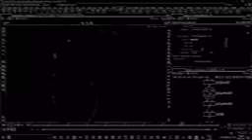More poly extrude to the bottom of the top one, because we want it to face the bottom one. This is the top one, the bottom one we extruded the top, and the top one we want to extrude the bottom down. So that's what this extrude number 7 is.

More extrusion, I pull it out like I did before. We all know how to fix that, edit it back to like a square like this. Very simple, we are working our way to get the shape. So you have that in your mind, and you work towards that.

Have a situation where we think that we have enough polygons. We have a polygon here and a polygon here, we have some here too, and we want to use a bridge. I think one bridge on this side, okay, and I'll do one on this side too. So, boom.

I created make circle, remember make circle? We tried that in the initial part of the course, okay? But it's very simple. Make circle is when you select 4 polygons, okay?

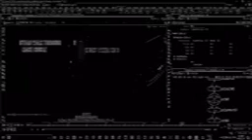So let me show you real quick. We are still on the edit, right? Because you use the edit to do that. So when you are on the edit, you have to call the move tool, right? Hold shift, select this polygon, select this polygon, select this polygon. You have 4 polygons, remember?

And then you move away from the polygon, because when you get close, you're going to have this dialog or this menu, and this menu does not have make circle. This is the one that controls the handles and stuff, the view. So when you move a little further away from the handle, somewhere around here, and you right click, you have make circle here. See, it gives you a lot of menu to make working easy.

This is where we straighten up the points. If the points are crooked and they are not lining up, we can straighten the selection of the points, relax selection, even space selection, make circle, flatten selection. So it's a lot, but they are very simple. You can go through them.

But this is what we want, we want make circle. If I select it now, watch, boom. So it makes the circle. With this, if you extrude it, it's easy to have a circle.

So boom, I extruded small here. Okay, extrude, pull it out. You see, so we have this design going on. Pull it out longer with the distance. See, the distance has some figures here. See, so we have the handle. Very cool. So you see that you start something small and you work your way out.

And you start creating, this is the actual modeling. You pulling stuff, and you beveling, you poly extruding, you editing, and you getting the shape you want. Okay, so let's keep going.

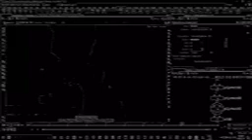Boom, poly extrude, boom, we're getting the handle. See, these are all for the edge part of it. More edit. More edit going on.

More edit, poly bevel. Trying to make it look good. So we're beveling the edge of it.

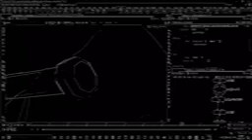Poly extrude. Now this poly extrude, let me show you, because you see, I want the next handle not to be the same under here. I want it to shift a little bit. So I need space here, I need it to come here. So I have to pull these boxes out, and it will give me more space here so that I can pull that one out here so that this poly extrude. See, it gives me more space here.

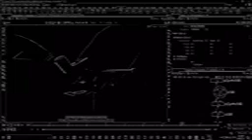So now the next one is similar to what we've been doing. Edit with make circle, so we have a circle shape there. We extrude it out. Similar to how we created here, we have to get this design going on with more editing.

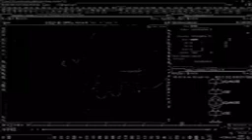Poly extrude, so we are getting the smaller part of it, and you can see that they are not lying straight, they are shifting small. See, you have to think like that, and you could make things happen.

Okay, so similarly like we did here, I will mess with it a little bit more. Editing, poly extrude, more editing, poly extrude, poly bevel.

See, it's looking better, and now more edit. See this edit right here, you can see how it was straight, right? But I wanted this middle part to be thicker, so I will select that and edit it.

If I bring the display here, you can see that this part is scaled up, giving it that thickness in the middle, you know, so when you handle or something like that. So that's what that edit is for.

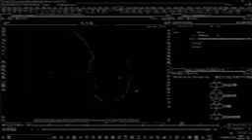Then more PolySplit or edge loop, PolyDraw. Now the PolyDraw is when we come out here, because see, they still have some stuff going on over here, so the PolyDraw will help me create more lines to create that shape. Let's see how that shape was created.

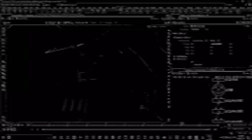Similar to like we did here, same procedure: we make a circle, then we extrude it out, then we push it around. Very simple. See, first insert, second extrude out. Then we are trying to get the shape. Very simple.

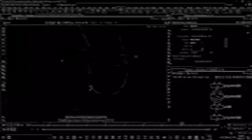See, but the shape here is not going straight like that. It's shifted, looking outside from the tube, so we have to shift it to the right. That's what this edit is, you see, it shifted the polygons to the side. Very simple.

It's two of them, so I have to create another one, same procedure.

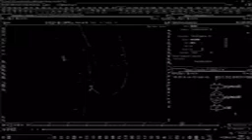Same thing. Now the edit, how do you shift it? You select, you'll be on the points, right? And you select all the top points and move it to the side. It will shift it, very easy. See, then it shifts to the side.

So at this point I have the handle. Very cool and simple, see, I have the handle, it's out from the edge of the inner tube. It's stuck in the indent how you want it, and it has two handles where the rider can control the bike. Very cool. So with that simple drawing we are able to pull things out, move things around, push the points, pull in, which is modeling, and we have this crazy shape over here.

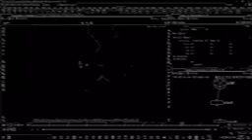So do you have to do the same thing on the other side? Hell no. You know how you do that is mirror, boom, and you have it on the other side. Very cool, right? And simple.

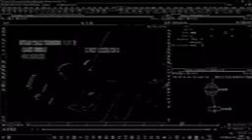So as usual, we use the normals to clean the shape. All right, so even now, if you pay attention, when I bring the video here, you see the reflections will change, meaning there's been a little smoothness to the shape. So watch, see, it's better right now. So every end of your objects, you need a normal.

I've already explained what the normal is used for. It helps you when you take your object to another software, it will appear right, because Houdini uses a different system to calculate, and game engines and other stuff use vertices, right? So it's not just smoothing stuff, but it's very important to have it work right in those game engines.

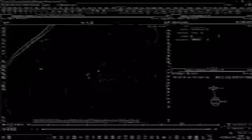All right, okay cool, so we have the steer. Very cool. So the back footer is the same as the front, and you guys know you draw it, pull things out, push things out to where you want to be, create stuff with whatever design you have in mind.

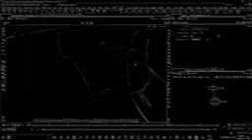It's very simple. You guys know how to make circle, put circle from polygons, and make square designs, pull stuff, call tools, call other objects, combine them, merge them with Boolean, and that's it. It's like when you have those techniques, you can create anything, because that is modeling.

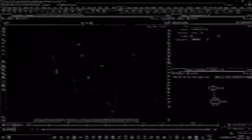And you can see that this thing looking kind of complex is very simple, and it's the same stuff we've been using: poly extrude, poly bevel, call other object, Boolean and stuff, and you are done.

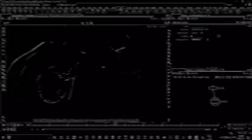So thank you guys for sticking around, and in the next class you will try to get through the hatchback here, this design here, and we'll be done with the bike.